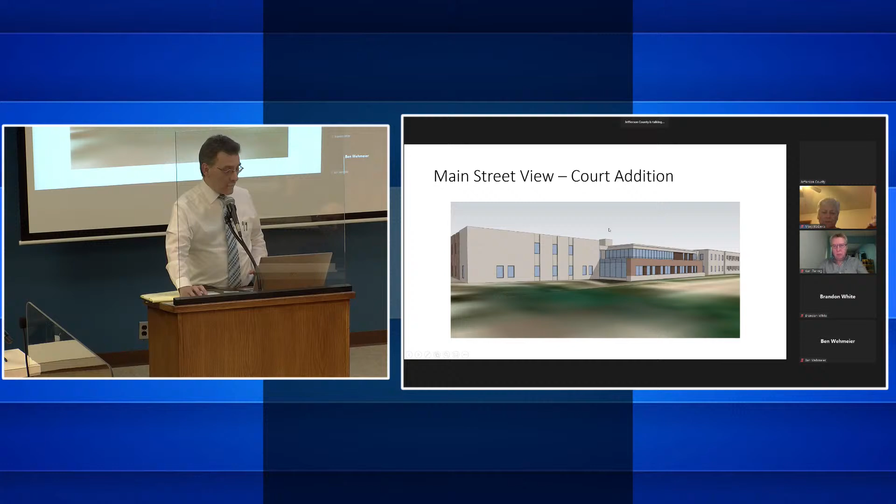On the exterior design, for this image you're seeing here, some of these you've already seen. We're starting to clean these up, get them further along. For example, this is the courts addition we're talking about, in which the actual addition is sitting in this area. We're keeping a lot of the existing precast on these existing buildings. We're trying to take the building materials for these additions and tie them into your existing building, so that combination of the brick and precast you have out there, trying to tie that all together. I think you'll see that as we move forward.

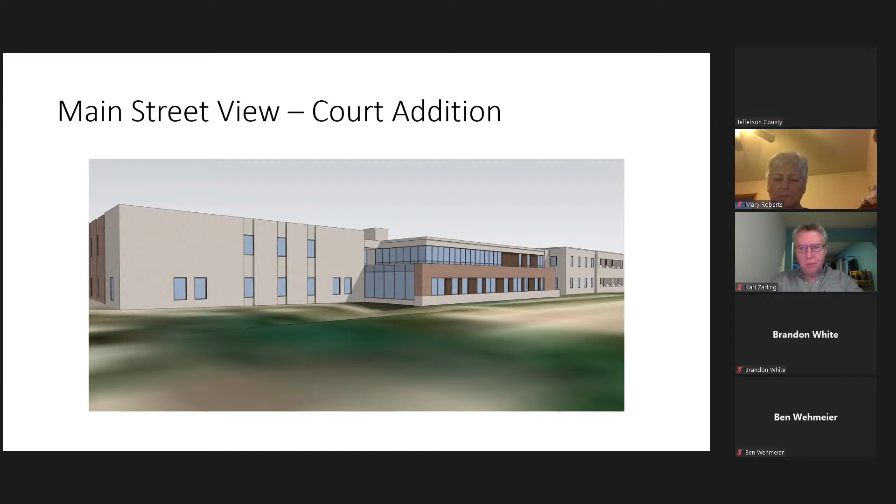Which one am I looking at? There we go. This is at the Law Enforcement Center addition. One thing to let everybody know at this meeting, we did meet with the city and got the variance approved for the setback requirement. That was not an issue at all with them. So we're okay and clear with this addition to be sited as we've been showing in our documents.

The addition here is pretty much in this zone, tying in with the existing language of the existing precast. What we've been able to do is go back to staff and talk about window placement. There's a lot of special types of spaces in the Law Enforcement Center addition. For example, you have emergency management down below with their offices. We've played off the same language of punched windows you see on other parts of the building, same kind of detailing.

However, on this ground floor in this area, after working with emergency management, that's our emergency management operations room. No windows, they did not want any. They've got a lot of large monitors on the wall and didn't want daylight coming into those spaces. Adjacent to that is the locker room area. So we've worked through that window placement and everything.

Up above is where the dispatch center is. We wanted to strategically locate some windows. They wanted some daylight coming into that space, but wanted them up higher, more like a clerestory. They also have monitors on the wall, so we looked at where glare would be coming in from the windows and tried to identify strategic locations for windows. We've taken it to that next level on this plan.

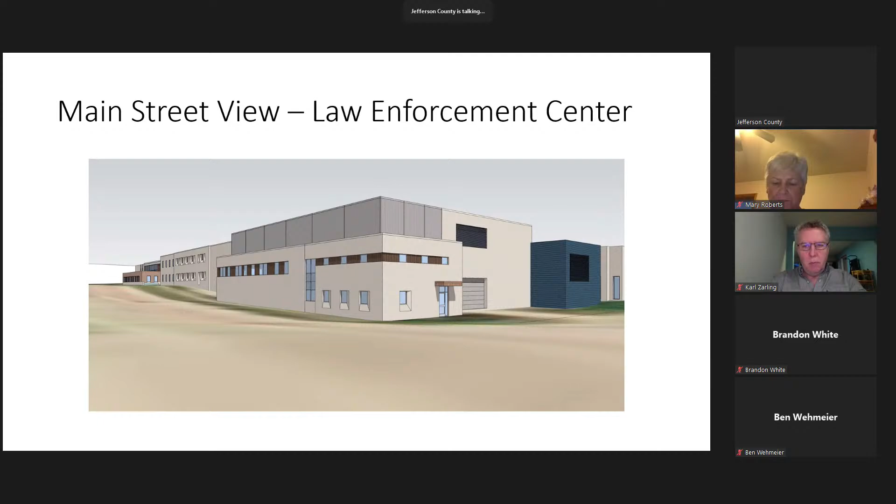All we simply did was play it in with the volume of this existing building with that height, kind of wrapped it around, so it feels like it's not another protrusion higher than the existing building. It all wraps in and around together. And then the last piece here is the addition on the northeast.

Right now, the existing building sits in this area. I was really just playing off that same language with the vertical brick piers marching along. We got a little playful with it with different widths, trying to modernize it a bit more, a little more contemporary, kind of playing with what you might see in a building built today. But again, the whole idea is that it all ties in together with the existing building. So all 3 additions are very considerate of existing materials and existing language on the different existing buildings, trying to tie into that, but giving a little more of a contemporary twist to it.

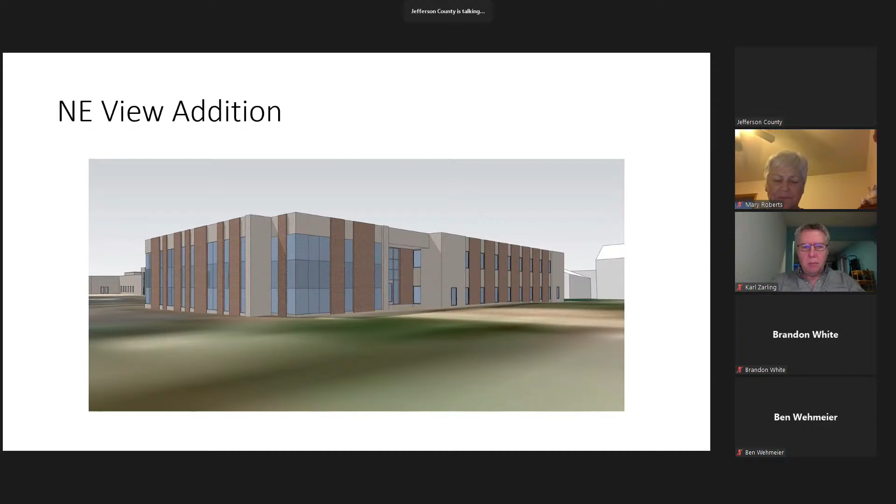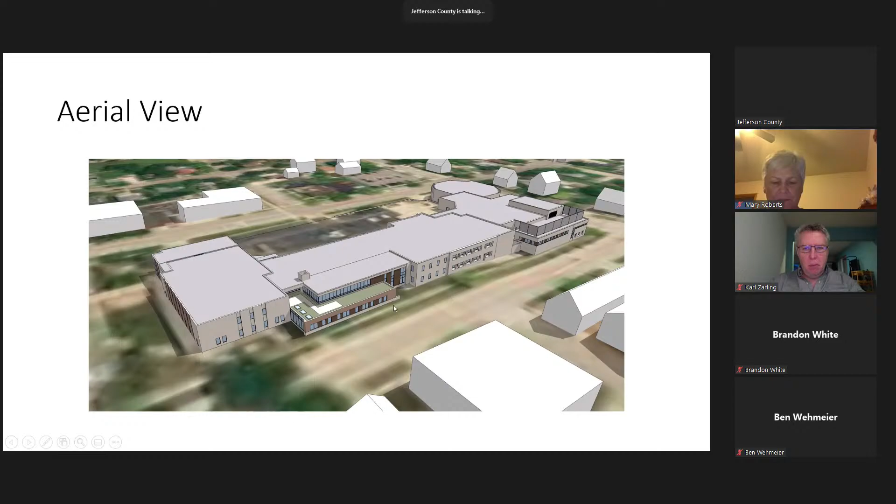Here's a couple of overall aerial views, just to see the complex existing building sits all through this area. You can see the northeast addition, the administrative wing addition here. Off on this side you can see where the courts addition is, and then the law enforcement center addition there. And there's another view of it here. So again, that's the northeast addition, the courts addition tucked in here, and the law enforcement center addition in that area.

A couple of the other spaces we looked at more closely, and I'm going to start with the county boardroom. That's this room here. One of the things that was very clear from staff as we started the programming on this space, they wanted to make sure it was a flexible space, that could be used more than just once a month for the board meetings. So the intention here, I'm actually going to go to the next overall image.

So the intention here at the overall layout, just to orient you, that set of doors right there, or right behind me here, the platform now sits in this location. A couple things: we wanted to reorient the space to make it more flexible, I'll go through that in a minute. We also have to make the space ADA compliant. Right now the platform is not ADA compliant; you have to have some sort of ramp to get up to that level to make it ADA compliant.

So the discussion was, if we reorient the room and put the head wall at this north end over here, we'd introduce another wall about 4 feet off the face of that existing wall, and we would tuck the ramp up behind that to get up to the platform at this location. Therefore meeting the ADA requirement to get up to 14 inches to that area, it's tucked away, hidden behind.

But the other driving force here is that flexibility. So what we're proposing is 2 operable walls, one that comes across here, and I think you can see that in the plan. There's an operable wall that comes across here and here, so that in non-county boardroom times, you've basically got 3 conference spaces that can be used on a daily basis for staff. So basically a partition right through there, and another one going there. So you'd have 1, 2, and then all the fixed seating is in this two-thirds of the space, creating 3 different conference areas. Again, very flexible, and it meets one of the needs that staff had always talked about, needing more conference space within this area.

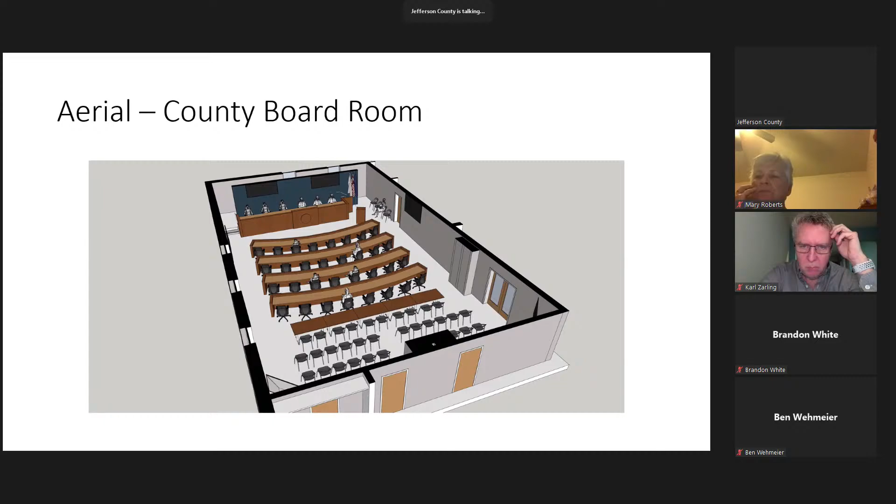So now the general public is seated at this location here, and your representatives are all up here. And of course, we've met the means of egress requirements for exiting and things like that. So a lot of that's been worked through at the boardroom. I think that's been the direction that the Building and Grounds Committee has been comfortable with moving forward with this room. So that's one of the new updates.

The other thing I want to talk to you about is the courtrooms and the designs of the courtrooms. Number one driving force for renovation of the courtrooms is they do not meet ADA right now at all. And it's something in any sort of remodeling project with courts facilities we're going to be required to bring up to meet the Supreme Court guidelines for courts facilities.

So this first image that you're seeing here, this is the ceremonial courtroom. This is on the first floor, the far courtroom. The current courtroom sits right about in this area here. This is the courtroom that we are expanding back further in this back area along here.

From an ADA standpoint, we're renovating the whole jury box so that the first row sits at the elevation of the well of the courtroom with two chairs, chair here and chair here, that can be pulled, quick release, can be removed, meets our ADA requirement, wheelchairs can be brought in. The second tier in the back is up one step, 6 inches, therefore making that ADA compliant. We've got the clearances to all work with that.

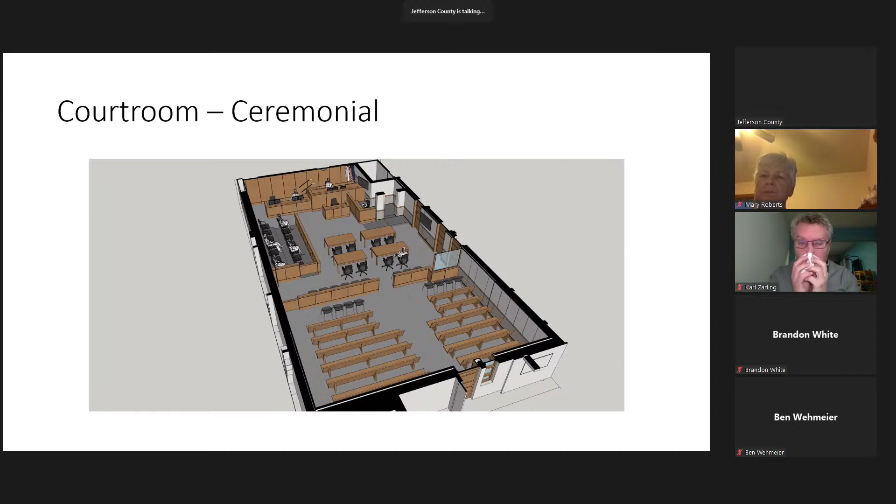The other component, your witness stands right now do not meet ADA. So the intent here is we've been working with the district courts. We're allowed to introduce a temporary ramp that can come up into this area and the witness sits in this location.

The organization of the courtroom is also a little different in these courtrooms, whereas the witness is not sitting right next to the judge, but sitting close proximity to the judge, but the jury then has a very good view of the witness, and the judges seem to be really on board with that. As a matter of fact, that was one of the judges' requests. The district, or the Chief Justice, was really interested in seeing this option laid out. So that's kind of the direction we've taken there.

The well of the courtroom has gotten a little bit deeper. We had to move the rail back about 3 feet in order to get the ADA requirements to work and also get proper clearance for bringing in inmates and things like that. So all that's been vetted out.

We even went to the point in the courtrooms of setting up cameras at different locations so that we could view from that certain height, pan the room so that we could make sure the judges were comfortable with how much of the witness they could see, or if they're getting to see enough of the front of the face or the side of the face. So all that's been kind of vetted through at this point.

The gallery seating in this courtroom, we've expanded up to 60 to 65 people, which is much larger than the current courtroom, which sits closer to 30 to 40 people. So this one wanted to be expanded a little bit more in that regard. We're trying to use as much of the existing seating as possible, wherever possible.

One of the things we've done is that front row, and we're just showing a few chairs there. The intent is to create flexible space, so those are ganged chairs that come together. What that allows us to do is meet ADA requirements for wheelchair seating. We have to have at least 4 chairs, a space for 4 chairs, and an adjacent seat for up to four people once we get above 50 people. So the idea of having flexible furniture there allows us that accommodation.

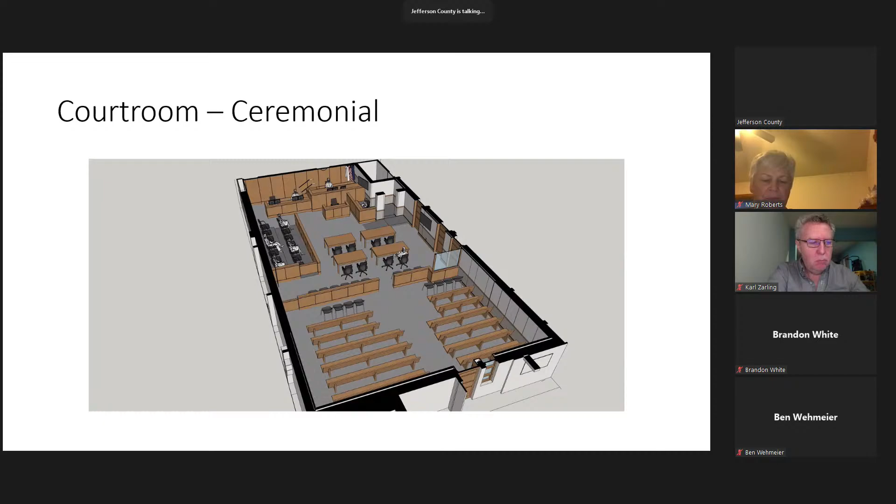Technologies, we've had our technology meetings here, and we've met ADA requirements for the ceremonial courtroom. This is just another view of that space. Again, the whole discussion there is how papers pass between the clerks, sight lines between people - all that's been studied and assessed at this point.

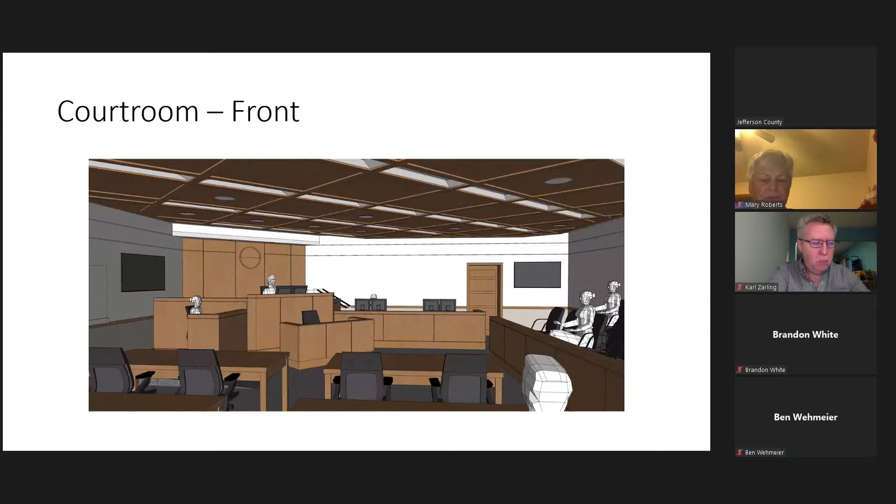I want to go to the overall here. The other 3 courtrooms are fairly similar layouts. They're corner benches.

Right now, none of the benches meet ADA, none of the jury boxes. So we're using the same jury box design at this location. The judge's bench is in the corner, 20 inches up. Right now, unfortunately, you're about 22 inches up with 3 stairs.

That doesn't meet code. You're only allowed a 7-inch riser. We're over that, so we have to rework that a little bit on the back side. The other thing with the Supreme Court guidelines is the judge - the guidelines recommend that the judge enters the courtroom at their elevation. In other words, they're not walking into a door here and ramping up to that spot.

So behind the scenes, back behind here, we've got a series of ramps. In one location, we got a lift to get that judge up to that elevation. So that judge enters the courtroom right behind them off a door here into their spot.

Again, it's a good security measure too when that egress is right behind that judge, so in case of an emergency, they're out that door. It's a simple swipe with their card access. The door locks behind them.

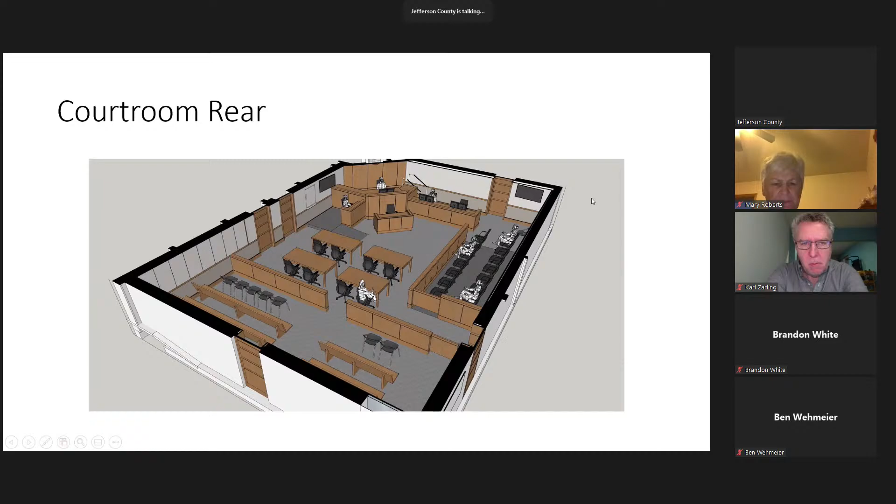We've also organized the space so that as the public exits the building, they do not have to use these back doors, this door here and this door here. That's all back behind the secured area. Public can only come out towards the front of the building, so we can keep these as card access doors at these locations. It's a good security measure for really keeping the public out in the case of an emergency.

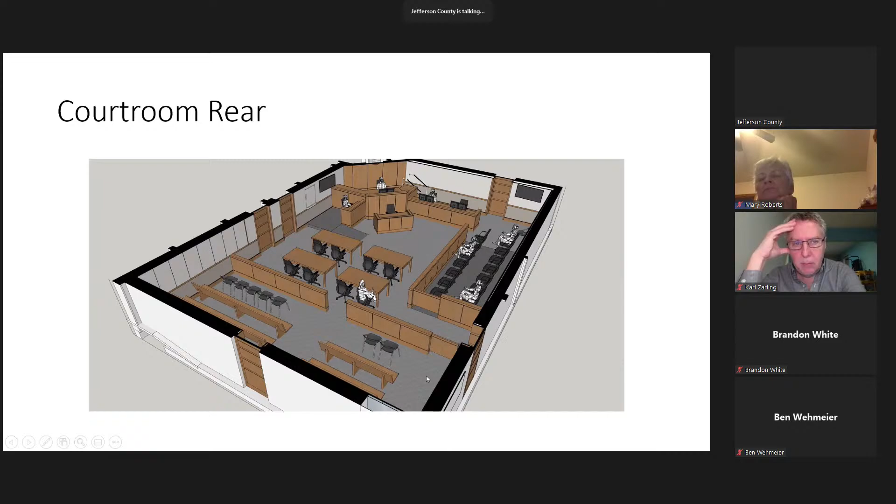Again, same concept with the seating out here. These courtrooms are getting between 40 to 45 seats, which has been fine with the judges all on board with that. The idea being that this also can be a very flexible row of seating here - they can add or take away chairs as need be, depending on people with accessibility needs.

And then the last group, I'll jump to this - your hearing rooms. Right now your hearing rooms are very undersized, about 700 square feet or so. Supreme Court guidelines recommend 1,000 to 1,200 square feet. So we've upgraded the size of those hearing rooms to meet those guidelines.

We've also worked it out with the location in the floor plans, if you recall, so that now your staff enters those hearing rooms from one side without going through the public corridors. Public enters from one side of the room, staff enters another side. Your staff is no longer mingling with the public.

Hearing rooms can tend to be very volatile and very vocal. Family court, issues like that can get very intense in those courtrooms. So the idea of improving security there was very important to your staff.

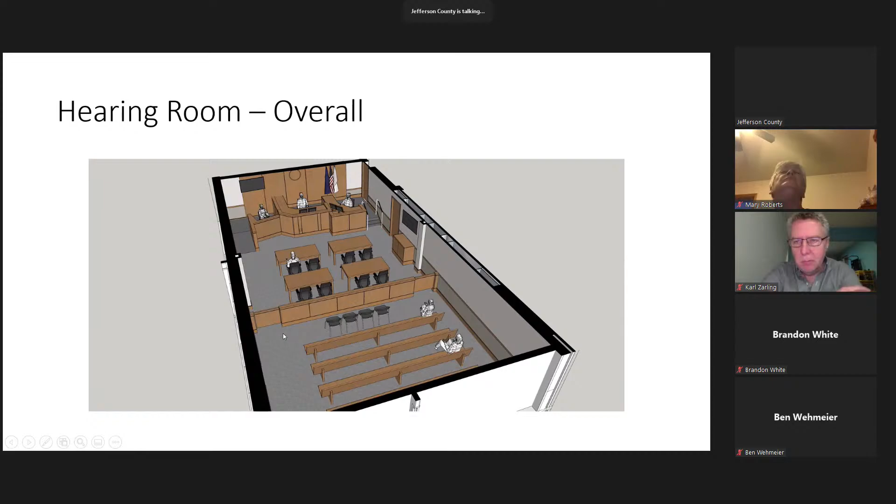So that's a real quick run through some of the special spaces, as we're calling them, as far as how the design has been moving forward. And again, we have met with our technology consultants in all those spaces as far as bringing that up, because that's a very important component throughout the design process.

I'm not sure, Ben, how we want to go through this next.

So this is going to be mainly Anthony initially, and there are a couple items I want Ron to comment on too. What we've tried to do on the sheets attached is look at some of the more significant cost drivers beyond inflation since November of 2021. You'll see a couple slides on how we got to that point and what the items were. Obviously one of the biggest was related to the law enforcement center. I'm going to let Anthony walk through the next couple slides, and then Ron will comment as well.

Thanks, Ben. We broke these down into some headings. Some of these drivers came up as Ron and his team met with agencies and staff here, continuing from November. Department of Corrections was a big one - there are a couple large items there. One is miscellaneous security upgrades and site work for the outdoor space next to the LEC addition, which is a pretty large dollar amount, around $300,000.